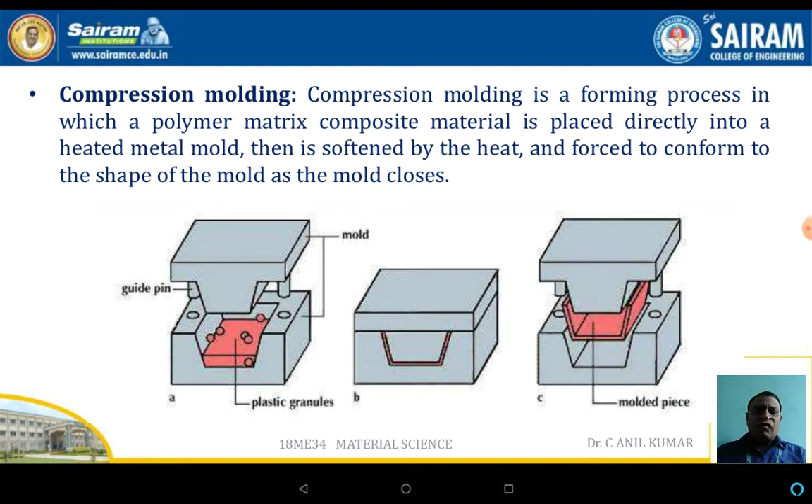Hello everyone. In continuation with respect to the closed molding process, now we will discuss compression molding. Compression molding is a forming process in which the polymer matrix composite material is placed directly into a heated metal mold, then is softened by heat and forced to conform to the shape of the mold, and the mold is closed. Compression molding is a high volume, high pressure method suitable for molding complex and high strength

glass fiber reinforcement components. Advanced composite thermoplastics can also be compression molded with unidirectional tape, woven fabrics, randomly oriented fiber mats, or chopped strands.

The advantage of compression molding is its ability to mold large, fairly intricate parts, which can be very easily fabricated. Also, it is one of the low cost molding methods compared with other methods such as transfer molding or injection molding. Moreover, it wastes relatively little material, giving it an advantage when working with expensive compounds.

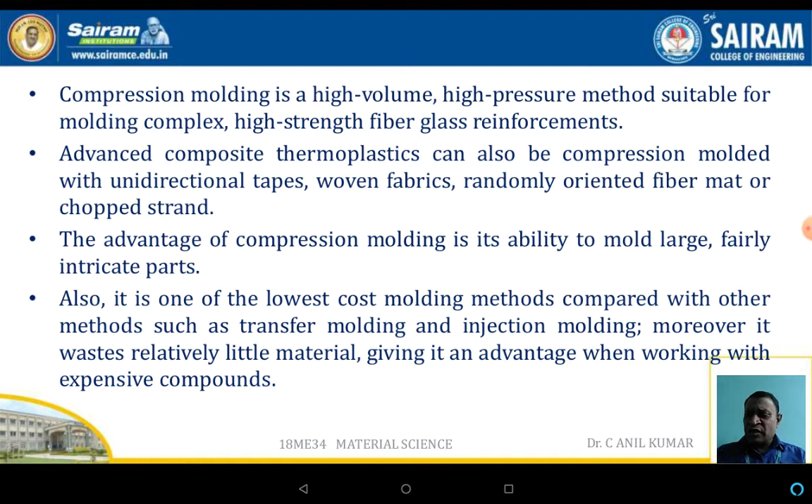The process characteristics. The use of thermoset plastic compounds characterizes this molding process from many of the other molding processes. These thermosets can be either preformed or granular, and can be shaped very easily. Unlike some of the other processes, the materials are usually preheated and measured before molding. This helps in reducing excess flash. As a side note, remember not to allow any undercuts on the shapes. It will make the ejection especially difficult.

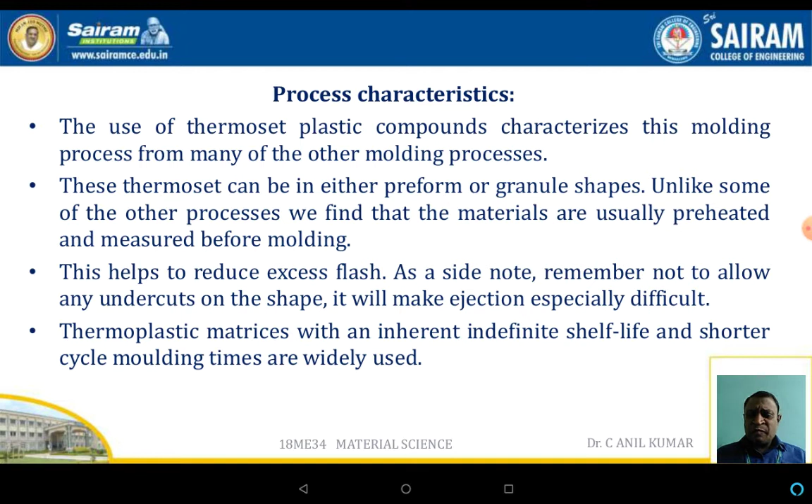Thermoplastic matrices with an inherent indefinite shelf life and a short mold cycle time are widely used. The advantages of this process are that the process parameters are easily controllable, high productivity, low rejection rates, and the ability to produce large intricate components. Good surface quality can also be obtained very easily. Precise cross-sectional dimensions of the product can also be maintained.

Disadvantages are that the molds should be precise, high equipment cost, and secondary operations are required for the process. The applications of this type of method are many. Some of the applications are electrical components, like switches and sockets, and automobile parts are fabricated very easily.

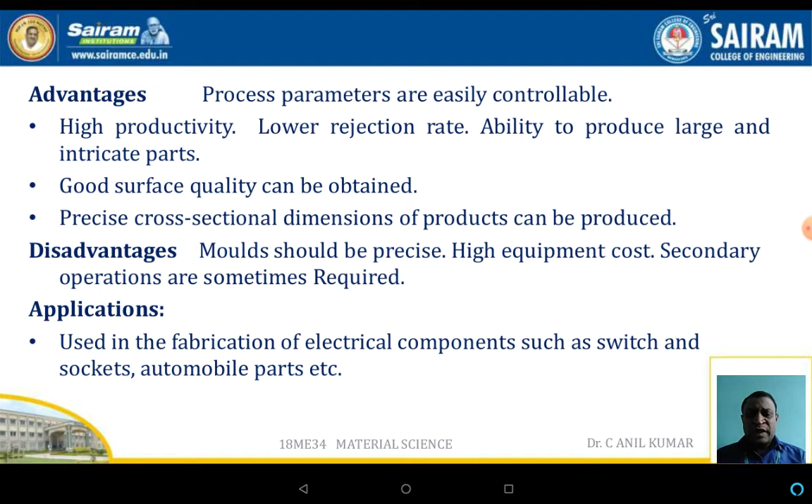Injection molding. Injection molding is a manufacturing process for producing parts by injecting the material into the mold. Injection molding can be performed with a host of materials including metals, glass, elastomers, etc. Both thermoplastic as well as thermoset materials can be injected very easily to get the components. Material for the part is fed into a preheated barrel, mixed, and forced into the mold cavity where it is cooled and hardened to the configuration of the cavity.

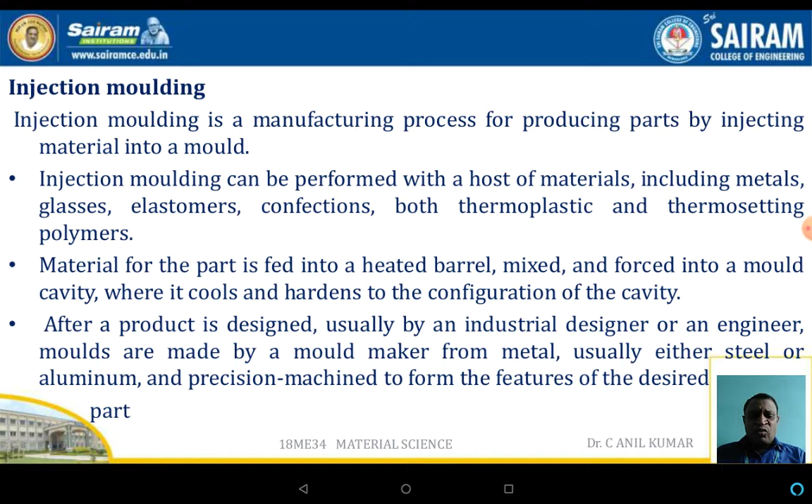After a product is designed, usually by an industrial designer or engineer, the mold is made to the shape using metals. Normally, the molds are fabricated using steel or aluminum dies with precise machining for a good finish and the desired shapes. Injection molding is widely used for manufacturing a variety of parts, from the smallest component to entire car body panels.

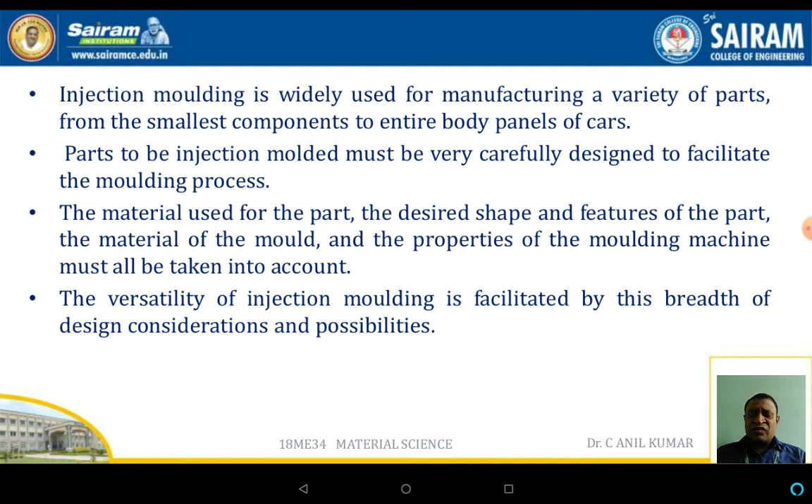The parts to be injection molded must be very carefully designed to facilitate the molding process. The material used for the parts, the desired shape and features of the part, the material of the mold and the properties of the molding machine must be taken into account. The versatility of injection molding is facilitated by this breadth of design considerations as well as the possibilities of the machine. The schematic diagram shows the injection molding machine.

The injection molding machine consists of the hopper where the material is fed, and it is passed through the barrel, where the barrel is heated. To move the material from the hopper to the mold, a reciprocating screw or a rotary screw will be there. The rotary screw is operated by a cylinder for a screw ram that is indirectly run by means of a motor as well as a gear.

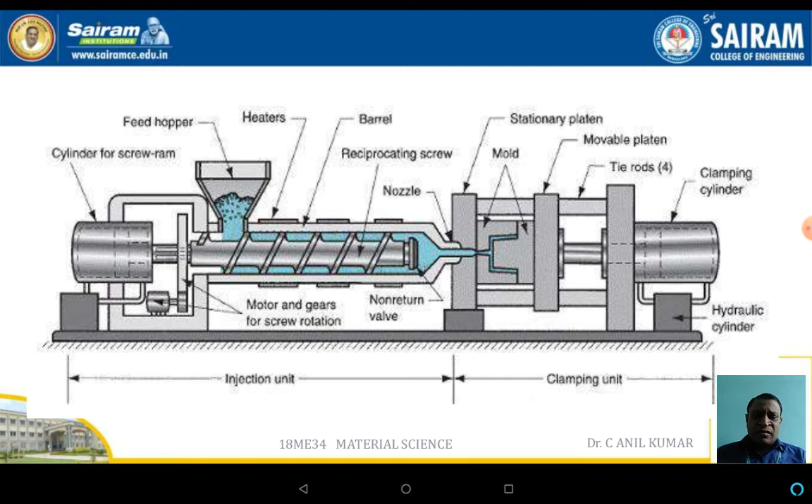On the right side of the injection molding machine, a nozzle will be there, where the raw material in the melt is pressurized through the nozzle to the mold cavity. After filling it, the cutoff takes place, then the cooling of the material takes place, and then the material is ejected using the ejectors.

The advantages: the process parameters are easily controlled, high productivity and low rejection rates, ability to produce large and intricate shapes, good surface quality can be achieved very easily, and precise cross-sectional dimensions can be produced very easily. The disadvantages are that the molds should be precise, high equipment cost, and limited length of the fibers decreases the reinforcing effect.

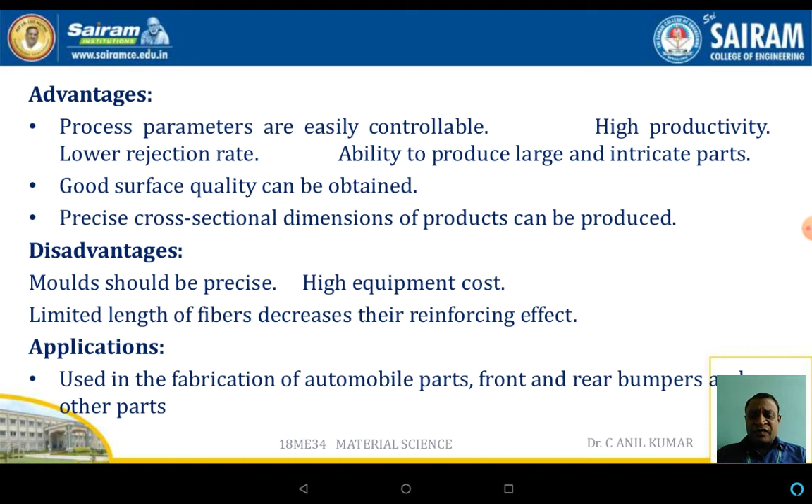The applications: as you know, the injection molding machine itself is costlier, so it can be used for high precision components, like bumpers or even some intricate car parts, and it can also be used for mass production.

MMCs. MMCs are composite materials with at least two constituent parts, one being a metal, the other maybe a non-metal, mixed uniformly to obtain an MMC. The other material may be a different metal, or a non-metal, like a ceramic or an organic compound, mixed together to get an MMC. MMCs are made by dispersing a reinforcement material into the metal matrix.

In the current industrial scenario, the need for lightweight and high performing materials in emerging fields makes a major application. Thus, MMCs have emerged as the strongest contender against monolithic metals, which are nothing but alloys. MMCs are used in the aerospace, marine as well as automotive industries. Aluminum MMCs or AMCs reinforced with ceramic materials or oxide particles are more sought after than any other MMC material.

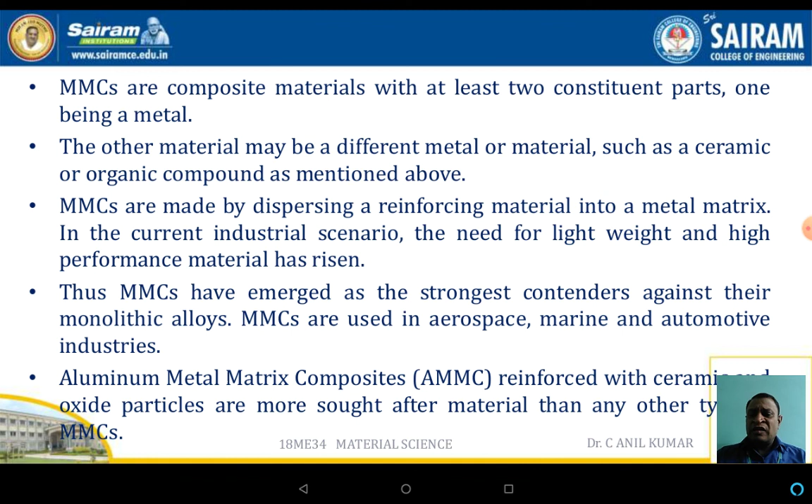This is because AMMCs exhibit a high strength to weight ratio, high specific modulus, low thermal expansion and excellent tribological properties. The following are some of the applications of AMCs: aeroplane panels, aircraft structures, automobile disc brakes, cylinder liners, driving shafts, automobile parts, electrical contacts, electronic packages, fuselages, helicopter transmission plates, landing gears, marine structures, missile panels.

So many applications are there with respect to AMMCs, whether in the aircraft industries, the electrical industries, the marine industries, or even in some cases general applications.